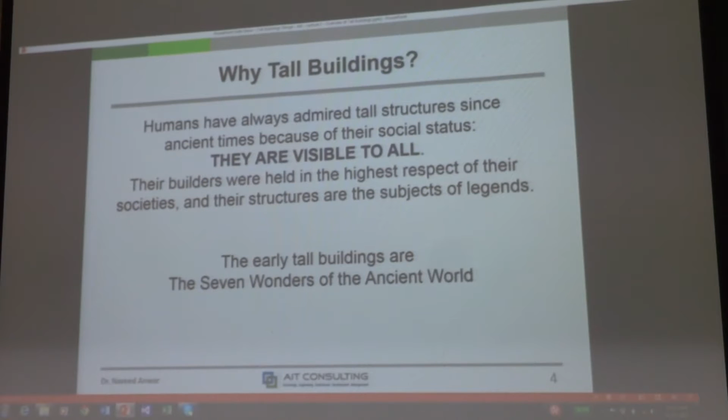This, for example, human being is only that much high. Why would we make a roof that high? Nothing in between. Useless space. But they want to make very tall columns and put the roof over there, even though they only need that much space to work under, right? It's just a way of showing your strength, your technology, your ability for greatness. So that's one of the background behind that.

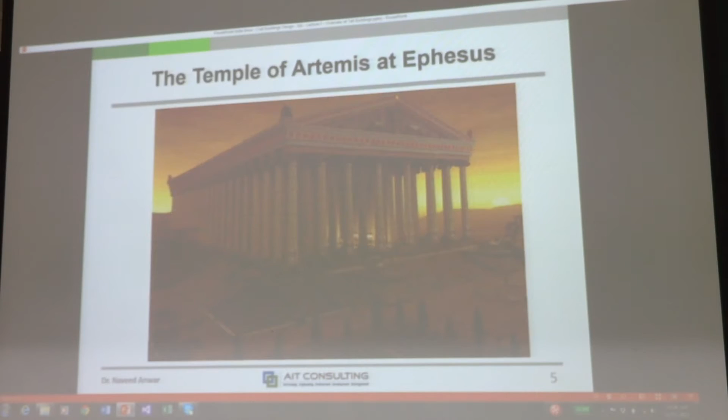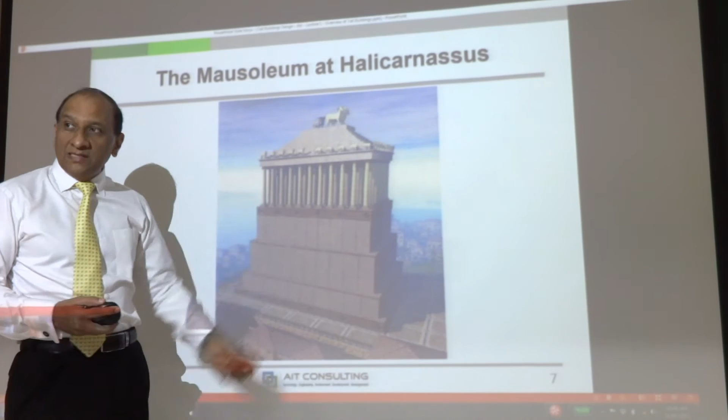So a lot of things that you see are based on the intention to make something really tall. So this is not tall enough, so they put a very tall pedestal, then make the building on top of that. No use, nothing in there. It's not even used. It's just solid. Nobody's living there, right? But they just want to make it tall. So at that time, tall was only possible by making it stone or solid, but not multi-story tall, as you can see here. Just tall, long columns, and then put something on top of that.

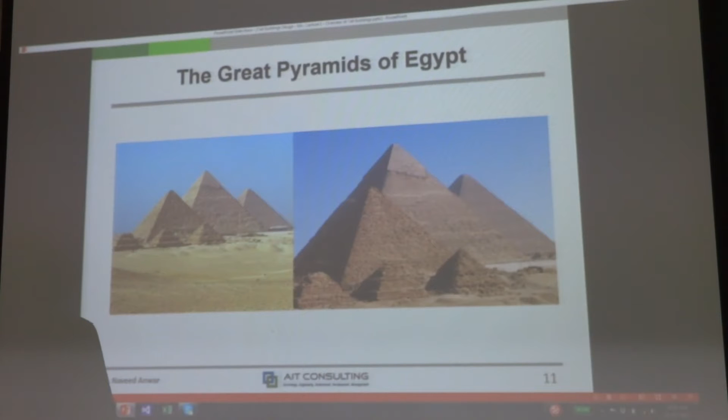Then there came other buildings, and even the statues had to be tall. Everything had to be tall. Halls have to be tall. The pyramids have to be tall. And of course, nothing in there. Inside you cannot even go. It's so narrow, you have to crawl. There's no space inside. But they make this huge place just for the effect. But now that time is no more there. Now we are in a different time where we need it.

And the reason we need it is because of two things. One is population growth, and second is urbanization. Everybody wants to live in the city. Previously, people lived in the rural areas, single-story house, mud houses, caves, and all those things, like the Incas used to live. So if you go back to history, people used to live very simply. But now everybody wants to come and live together in a small space. There is no space, so you have to go vertical. So that's the reason tall buildings are going to be very important.

So percentage urbanization means that most of the world in the next 20-30 years is going to be urban. That means about 80% of the population is going to live in the cities. So if 80% of the people are going to live in the cities, you are going to have to make many tall buildings for them to stay there and work there.

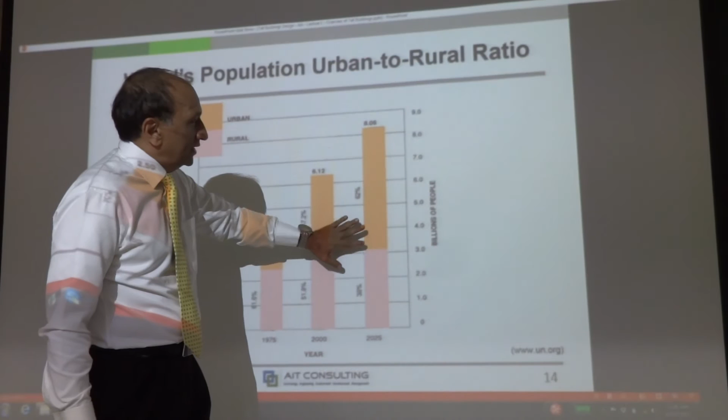So population growth also now is very high in many countries. So in these countries, population growth and urbanization combined together create a huge demand for cities to make tall buildings, even just for simple living, not to show off, just to live. We need those. And you can see from here that the urban to rural population is now changing, and very soon it's going to be mostly urban.

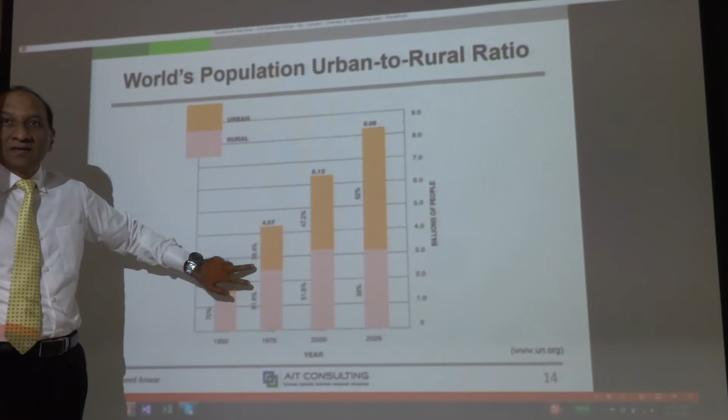As you can see from here, most of the population growth is going to be urban. Rural is almost now saturated, it's not going to grow. So all of the future people are going to move or live in the urban areas, and you can see from here, huge, from here to here about 3-5 billion people are going to live in cities, right? Currently, only 1.5 or 2 billion. So 4 times to 5 times more people are going to live in the cities.

Obviously, single-story houses are not going to work. There's not enough land there. So tall buildings are the need of this century, especially. Previous century, it was some cities only, big cities like New York, Tokyo and all. This century, every city is going to need tall buildings.

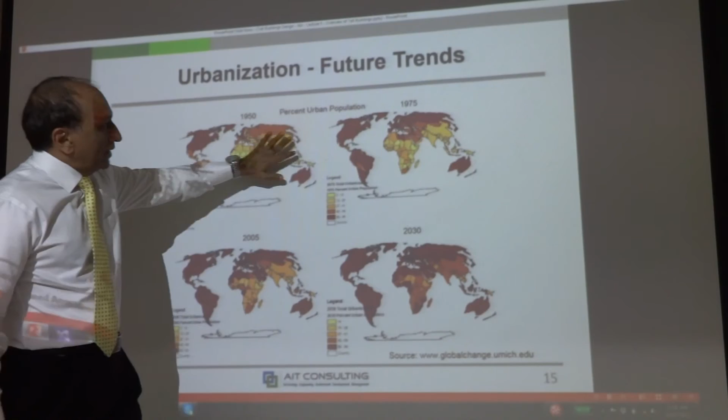And you can see that gradually, all these areas which used to be primarily rural are all going to be urban. Brown is urban. So by 2030, almost the entire world is going to be urban living, which means tall buildings. Right? So this course that we are now studying is going to be a foundation for providing or designing those tall buildings.

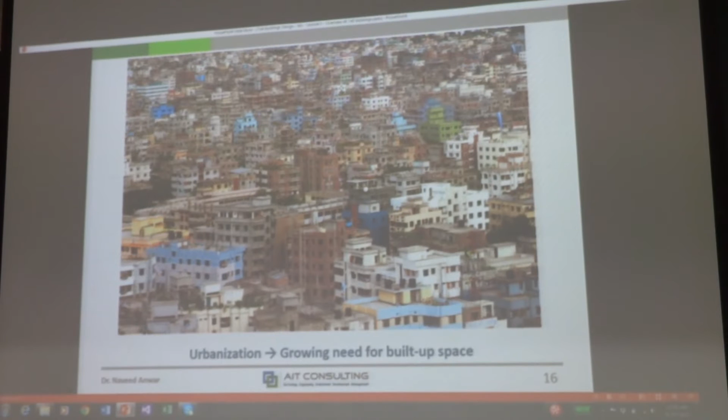These are some of the cities that you can see now. When we say tall, we will talk about what is really tall, what is meant by tall. Its definition is not universal. We'll talk about that. But you can see that congestion is going to force us to make buildings which are going to be tall.

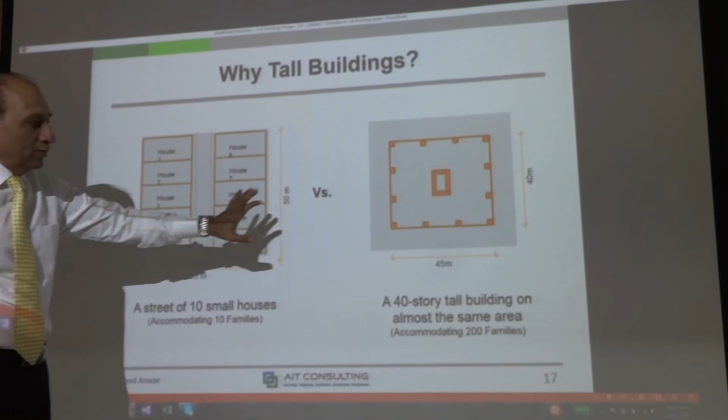Another, this is a simple comparison. On the same plot of approximately 50 meter by 50 meter, if you have 2-story houses, you can accommodate about 10 small houses there. So 10 families can live there. In the same plot, if you make a 40-story building, about 200 families can live there. So you can see that on the same land with a 40-story building, you increase the occupancy by about 20 times. And that is the reason tall buildings are going to be extremely important.

And then another new paradigm or new change in urban planning is coming up. When the United States was developed in the 60s, if you look at the cities in the US, almost all cities are planned in a very vast area, like Los Angeles and other places. So single-story houses, wide streets, and everybody needs a car. The whole culture of the US was based on the car. So if you look at that, the blocks and the cities are all designed like that.

England is opposite. London is totally opposite to that. It's designed around the metro, the underground. So basically, they don't want cars. Hong Kong is like that. No cars. All the transport will be by public transport, by underground or trains.

So the difference between the two is an environmental difference. Because people who live now in this compact city use much less gas, they use much less energy, they build much less roads, so they spoil much less environment. So from all those environmental considerations also, making tall buildings or making living based on the public transport system is going to be the key.

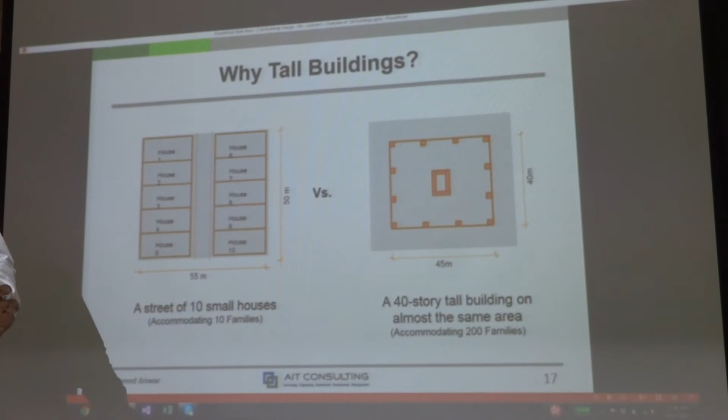So that means city centers built around the public transport system, an underground station around that building. Hong Kong is already completely like that now. Almost the entire Hong Kong has become like that. People don't own cars anymore at all. Hardly anybody owns a car.

In Hong Kong, those of you who have gone there many times, this is the office building, and from here to the apartment building, there's an escalator, a walkalator. So people just stand and walk there because it's all a compact city. So there's a whole cultural change which is coming, and cars are going to be out of fashion, which means that people will need tall buildings, multi-use buildings, office, accommodation, shopping mall, movie theaters, everything in one place, right? So for all that reason, tall buildings are going to be very important.

What is tall? That is a very tricky question. If you go to New York, for example, or even now in Bangkok or in Hong Kong, and if you ask somebody, what is a tall building? They will say, yeah, 70-story, 80-story, 90-story. So they'll talk like that.

You go to another city, let's say in Pakistan, in Lahore, what's a tall building? 25-story, right? Another city, 10-story. I have been to cities where they say we are designing a tall building, and how high is that? 10 stories. So 10 story is tall for them because that is the tallest building in that town. So tall is a relative term, right?

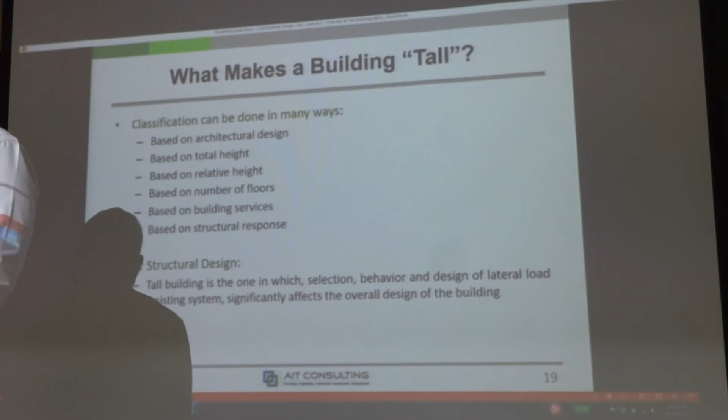In Bangkok, we don't even care about 30-story buildings. Everybody is doing it. Even junior engineers are given 30-story buildings because seniors are doing 60 and 80 and 90. So it's also relative, so it could be based on total height, based on relative height, based on number of floors, services, and so on.

But for us, structural engineers, our definition is very simple. If the building design is governed by lateral loads, it's a tall building for us. So if the lateral loads become important, earthquake and wind, more important than gravity load, then that means it's a tall building, because then the considerations for the tall building start to come in because of the lateral load system and all the things that we will talk about.

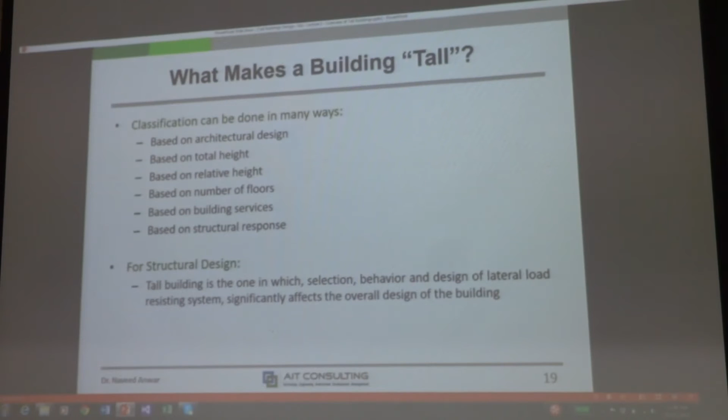So in fact, for us, any building in which lateral loads become important or significant, or they override gravity load design, then it is a tall building. So some of the tall buildings, I will try to get a new projector, it's not so clear.

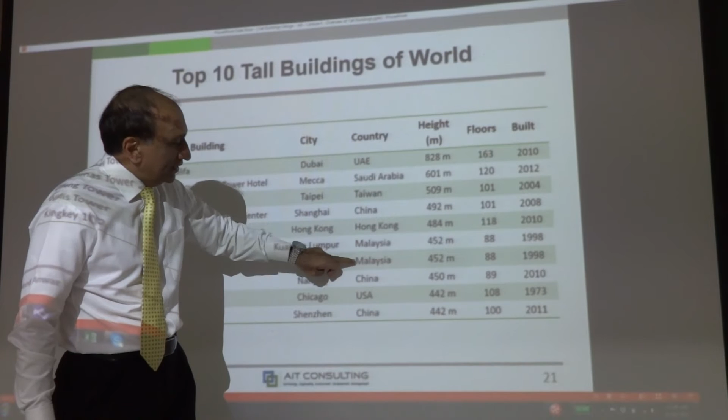UAE, Saudi Arabia, Taiwan, China, Hong Kong, Malaysia, China, USA, China. All of them in Asia except one, right? So that means this is the region where in this century most of the tall buildings are going to be made. Hardly any in Europe, almost none, maybe a few in USA, but almost all others will be here. So you are in the region where most of the tall buildings are. Everybody from US and UK who used to do tall buildings now have offices in this region.

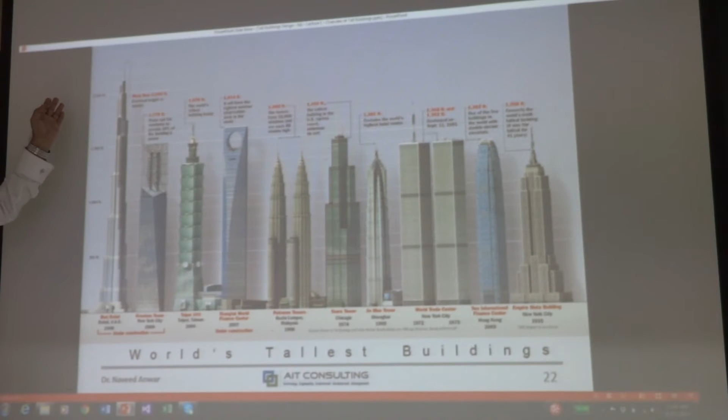And you can see also the height of the tall buildings, how they look in the current way. Of course, there's another one taller than this one, which is almost 1 kilometer high. This is 800 meters. The tallest one is 1,000 meters in Saudi Arabia. They're making it now. And then China will try to cross that one, and so on. So for a long time, this remained the tallest building, but then others came, and then suddenly it started to go.

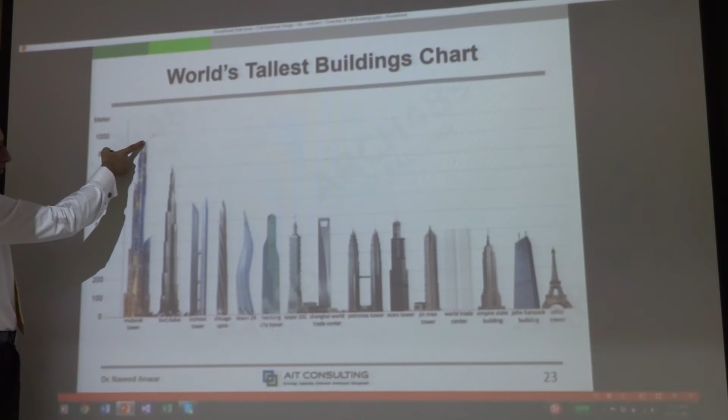This is how they look in real scale. That is Eiffel Tower on the right-hand side, the last one, right? And this is how the Saudi Arabia tower will look. This is the one in Dubai, and then all of the other buildings. So you can see it's going like this. Suddenly we now have a curve, before it was more or less gradual. You make a building, another one will make 2 meters above that.

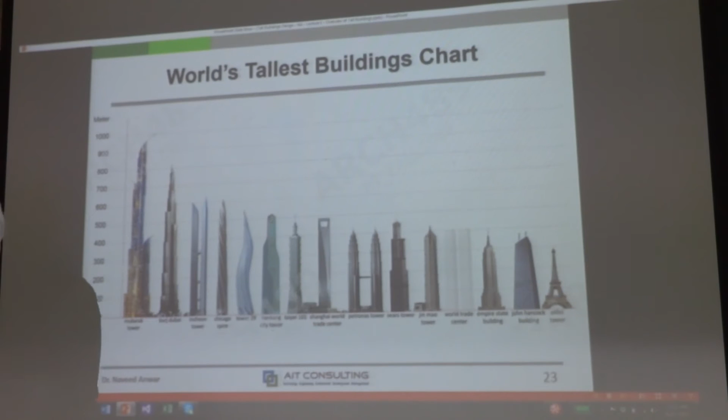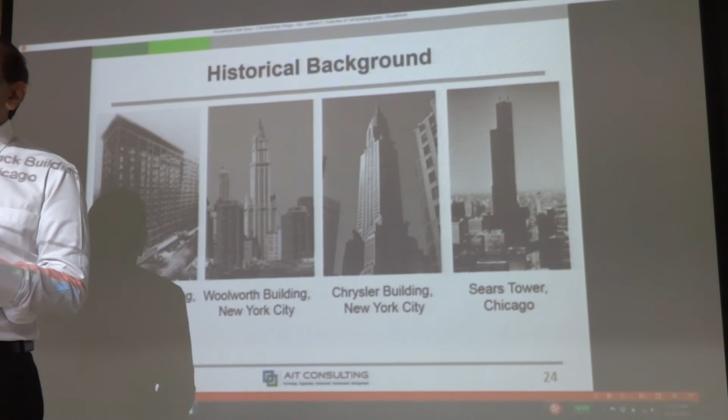Straight 200 meters. They don't want to make 810 meters because they want to make sure that the next one will not be easy to make. So that competition has changed the whole tall building design. So you can see from here how the height is going, right? Number of tall buildings is also increasing in the last few years.

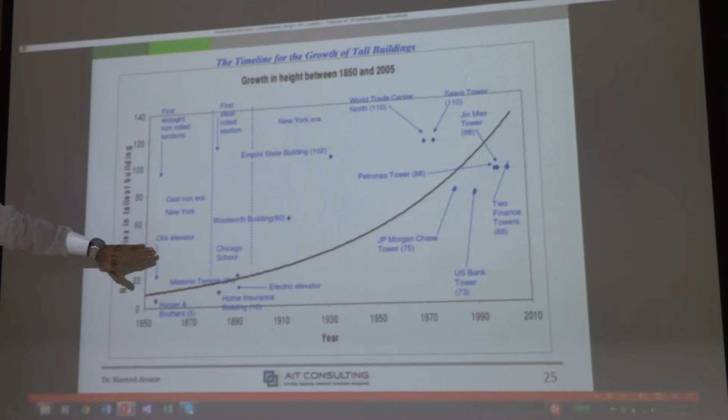This is the growth in height. So you can see up to 1000 meters, 1800 meters is possible. There was a time when we were studying, when most engineers thought 100 stories was the limit, 300 meters. Then somebody came up with 500. Now it's 1000, 1200. The designs up to 4000 meters are existing. They're just looking for somebody to finance it.

4-kilometer high buildings, right? Somebody has already created the design, the concept design, right? So you can see that this graph will go up very rapidly.

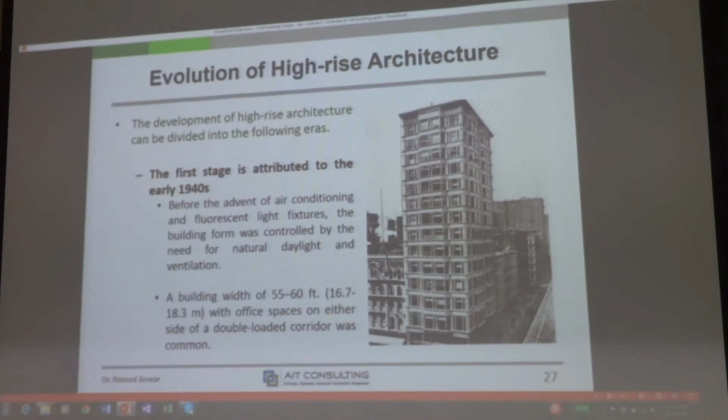So you can trace the whole history in architecture. 40s buildings were like that, very straightforward, rectangular form because they were made in very simple materials. Then the forms started to change, steps, then more forms, and now in the fourth phase architectural designs have evolved, and people are looking at form as an expression. But before it was just, make a building, so it's functional, you have enough space.

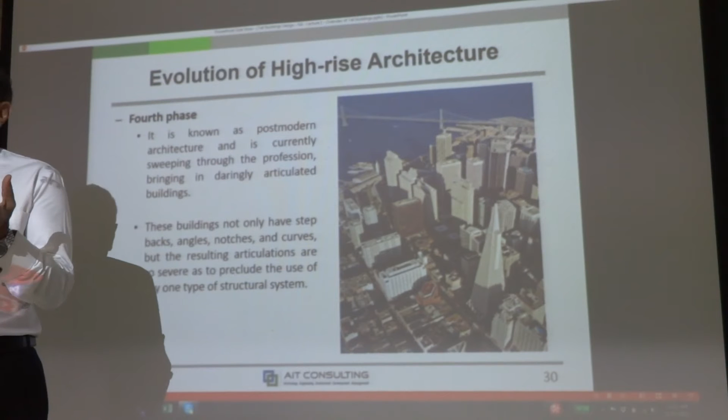One of the problems that was holding back the tall building is not structures, it was elevators. Because there were no elevators. So you could not make a building taller than a 6-7 story building, because who will go there? Then the elevators started to come. So elevator technology has lagged behind structural engineering actually.

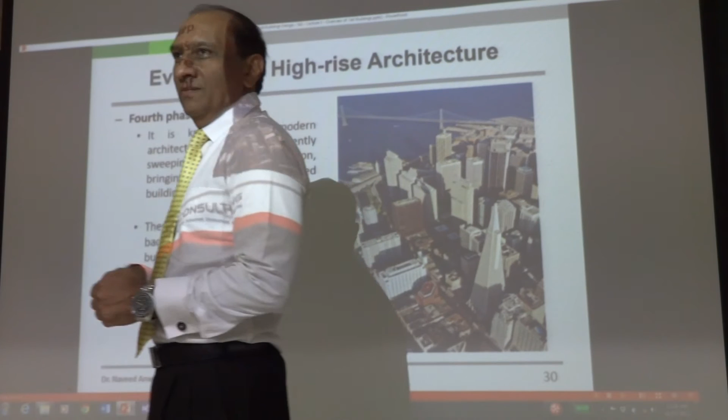So until recently, you remember last course I talked to you about a cable with the maximum length that it can take from self-weight, right? That was a problem with the elevator. Because the cable that will pull the elevator becomes so long that, no matter what you do, it will break by its self-weight. It cannot carry the elevator. So there was a limit on how long the elevator cable can be. That was about 300 meters, 320 meters.

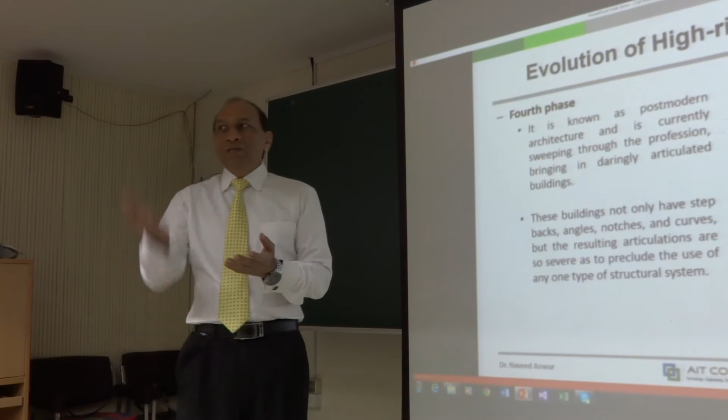So what the buildings did was, you have to change elevators. You go to 100 stories, then you change the elevator, and then the next elevator will start again. So that was what people did in tall buildings.

And then very recently they came up with carbon fiber cables. And that limit is no longer there. Now a single elevator can travel up to 1 kilometer with the new material. And that has opened up all of these buildings. And the speed of the elevator has become very fast. It can go 1,000 meters in 2.5 minutes, right?

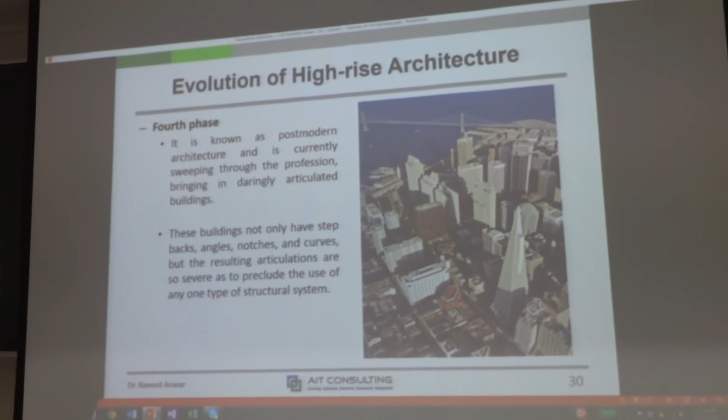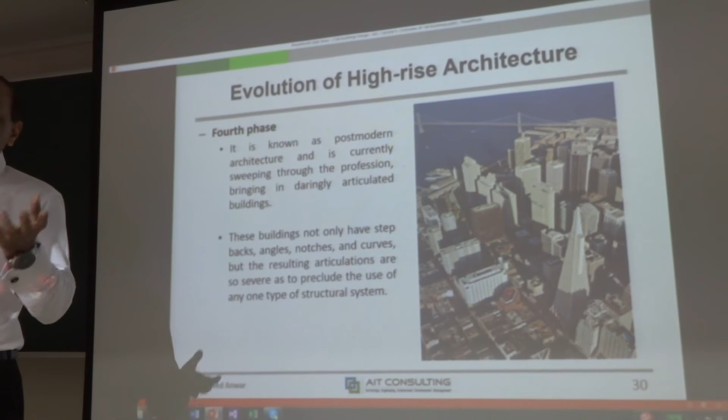So elevators have been one of the reasons why tall buildings were not made too high. And now that technology has caught up with structural engineering, and they are competing with each other on where the technology will go.

Now, the problem is energy. The challenge of the current age is energy consumption in the building. It's no longer structures, it's no longer elevators. It is now energy, because when we talk about the environment, I told you that we are competing with transport. So if you make the building so big, so tall, and it consumes a lot of energy, and this energy is more than the energy you save for people to travel in the city, then it's not worth it. That means to make a tall building viable, the challenge is to make it energy efficient.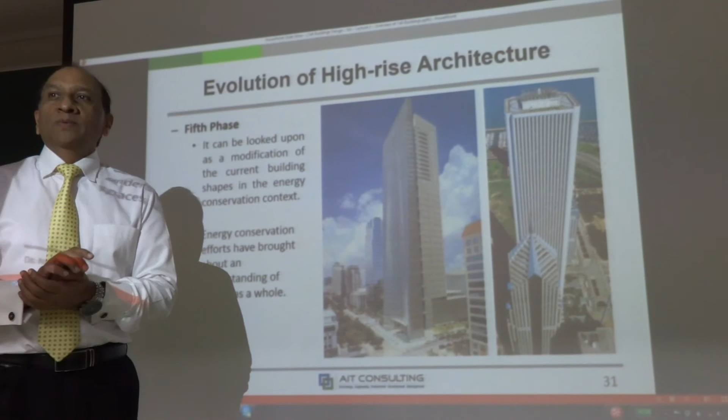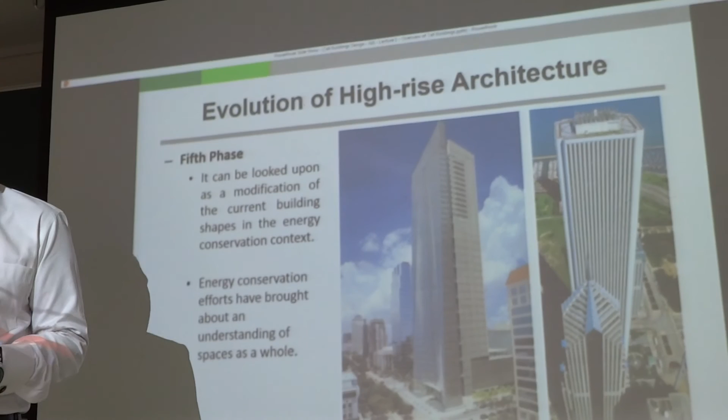So now most of the new development is on making buildings energy efficient. How to make the building sustainable, environmentally economical in energy efficiency. So a lot of new awards for buildings go to energy efficient buildings. Not for the structural system anymore, but rather for which building has better energy efficiency. So water conservation, water recycling, energy cycling, all of those things are becoming a very important part of the design.

So first it was simple buildings, stone, whatever, then architectural considerations, then elevators, then the structural problem, we didn't have enough structural systems, then it went back and forth, and now it's energy. So anybody who solves the energy problem in a building can make a bigger building.

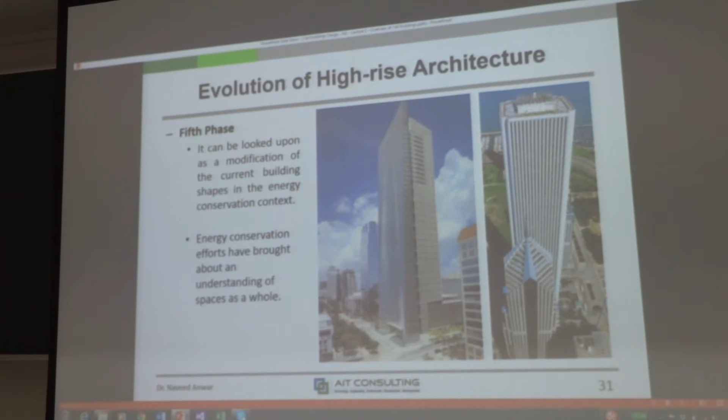In China, there is a guy, I will show you his design later, you might have seen it. He's making a building now which he says is zero energy, because they are generating the energy within the building from different sources. Even doors, when you open and close them, generate energy. People walk, and they try to get energy from there. So they try, and their building design is very interesting.

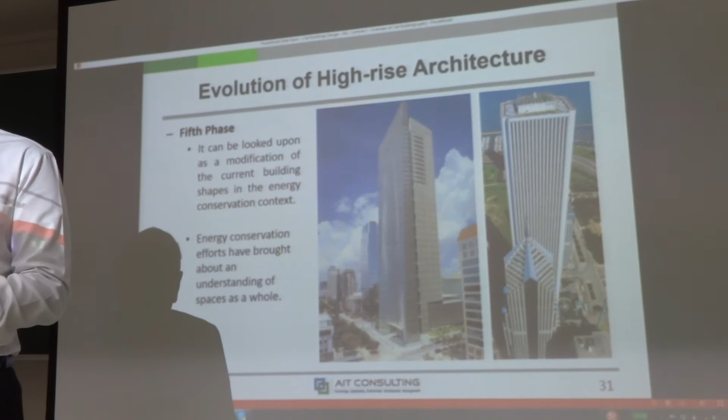The building is outside, and inside the building there is a spiral walkway going from the top to the bottom. It's a 120-story, 130-story building, but you can just walk on a ramp inside the building. So this is a multi-use building. People live here, they work here, the schools are also there, the hospitals are also there, shopping malls are also there. So people just walk up and down to reduce the elevator cost also. So things like that are now coming up in tall building design.

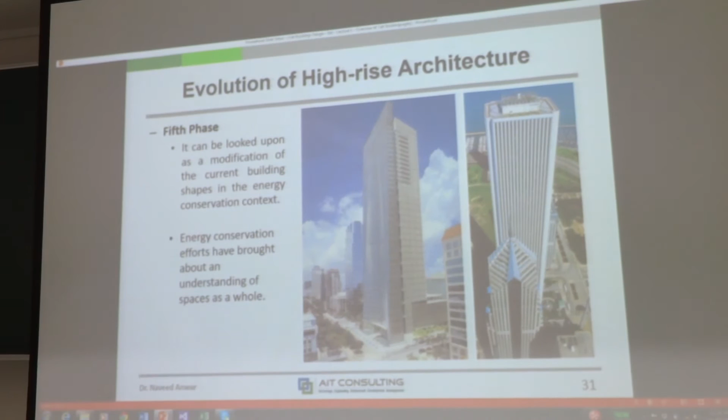This is the breakthrough point for structural engineering. We will talk about structural forms a lot, but I'm just telling you that the breakthrough point in structural engineering, just like the elevator shifting from steel cable to carbon fiber, for us structural engineers, is the tubular system. The concept of a tubular system actually freed structural engineers from the conventional problems of the structural system.

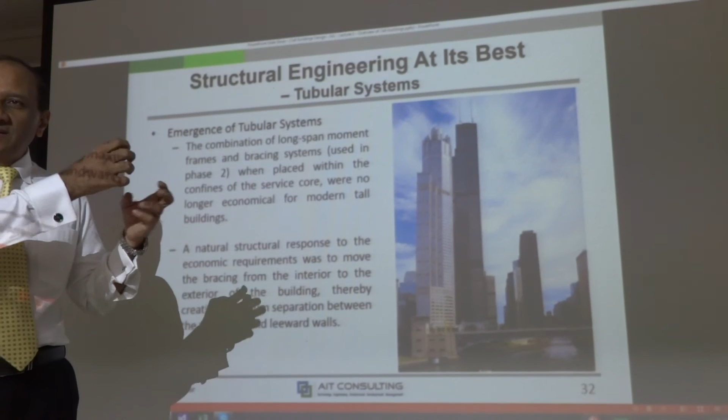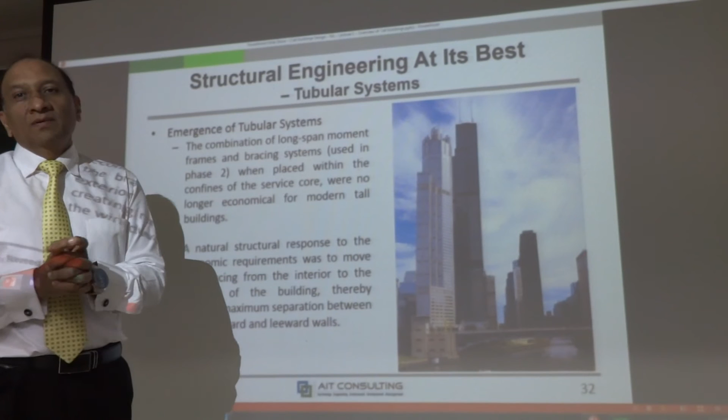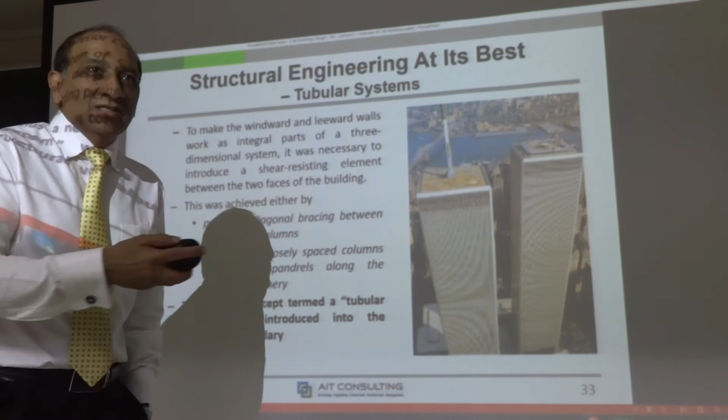These are two tubes, actually they were tubes. One of the reasons they collapsed when the plane hit was that the tubular concept did not account for such issues. But basically these were the first big applications of the tubular system. And then Chicago, the Sears Tower and others. So these buildings were only possible because of the development of the tubular system. And we'll come back to this one.

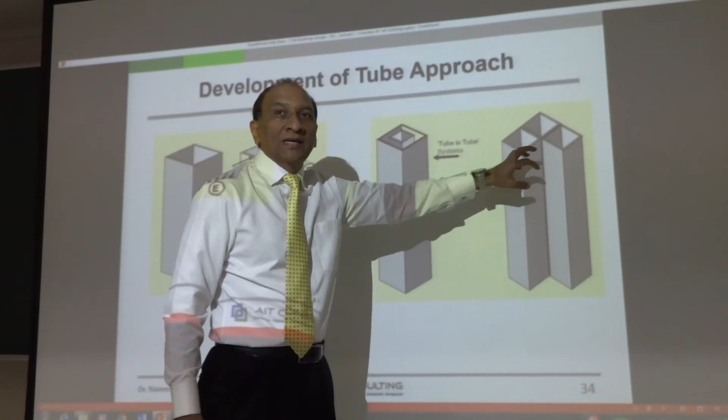But basically a tube means that you treat the whole building as one big cantilever rather than columns, beams and shear walls. So the entire building becomes one member with holes for openings. And then you can put tubes inside tubes or multiple tubes side by side, and that's why you see the Dubai building having 15 tubes, and 21 tubes in the other building. So different height tubes go up and down and they form the building. So the tubular concept is the one that we use for super tall buildings.

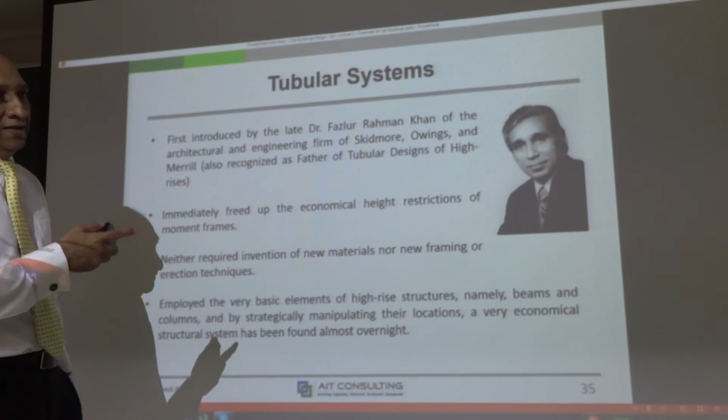And he's the guy who developed that. He also developed many other structural systems. So he's one of the key persons in tall building design. His designs and concepts have actually helped all the other engineers to design tall buildings. And the tubular system looks something like that. We will come back to this.

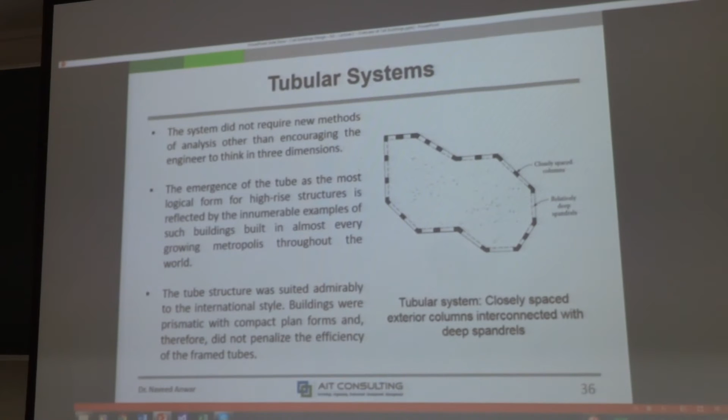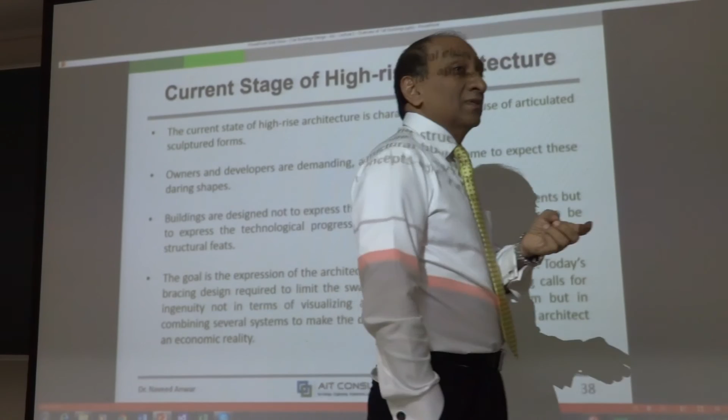So we are basically dealing now with two types of tall buildings. One is normal tall buildings, less than 300 meters, 200 meters, 300 meters, which are now becoming quite common. And then we are dealing with super tall buildings, 300 to 500. Now even a new term has come up, ultra super tall buildings, which are above 500 meters, because they are a different category altogether.

Now we already have 6-7 buildings in the world which cross that line, and the one in Bangkok is also going to be 600 meters. So these are really, really tall buildings. Currently, the tallest building in Bangkok is 300 meters. So the next one is going to be 600 meters, not 320 meters. Double that height, suddenly.

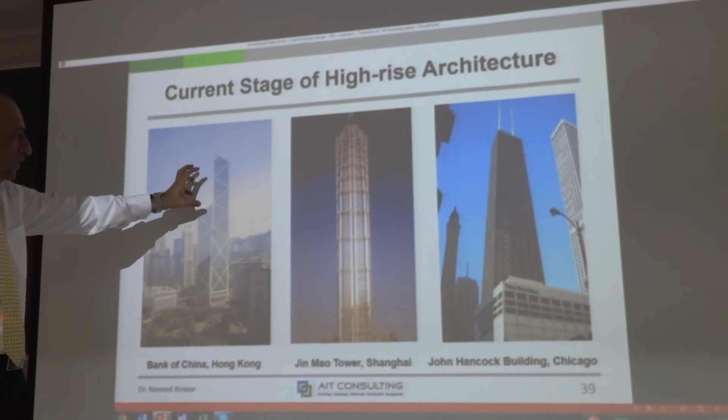So these are architectural expressions, forms; many things are going on, and China and Dubai are the leaders currently in the world for tall buildings, innovations, construction-wise, design-wise, form-wise, energy-wise, everything. All of the major development is going on in those two countries. Okay, now

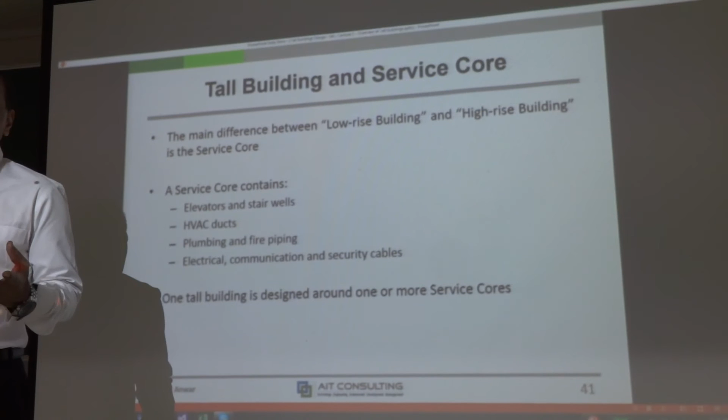if you look at the tall building, actually it's one of the projects where many different types of people have to work together. Unlike a bridge, unlike a dam, unlike a road, unlike other structures, other systems where one or two professionals are normally working. Of course, those things are also becoming complex now because of automation, but tall buildings particularly rely on many people working together.

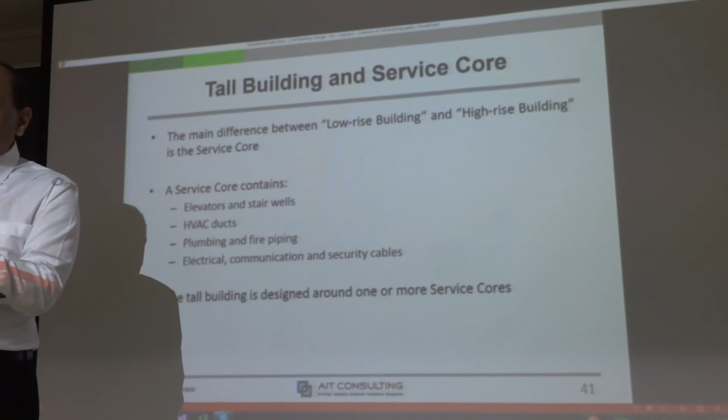And one of the key components of a tall building is the service core. You will see that the service core is the key in a tall building for everybody. That is the place which everybody uses to put their own design there. And around that is the area used by the public. So service core means that it contains the elevators, the stairwells, the heating and ventilation ducts, plumbing and piping, electrical, communications and security and everything. It is contained in that service core.

And that is also where we structural engineers put our structural components most of the time, right? Shear walls. So shear walls are generally put in the service core, or let's say the service core is put inside the shear walls, either way. So the service core is the key. A tall building is designed around one or more service cores, and they service everybody. And often in some plans, the service core area is larger than the area available for actual usage as the building becomes taller.

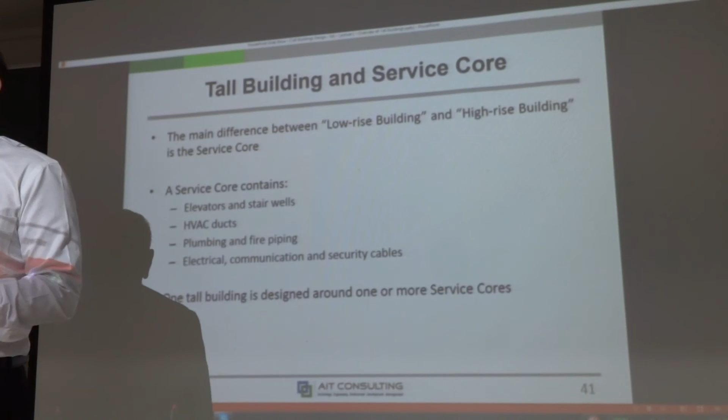Because you have to put too many elevators. You cannot put few elevators. When the building becomes taller, you have to put maybe 20 elevators. 20 elevators take a huge space, and you cannot make a tall building too big because of wind and earthquake and other things. So the service core is the key, and around that you find some small areas left for people to use with a view. So people pay a very high price for a small area in a tall building. Now you can see from here, so that's the service core.

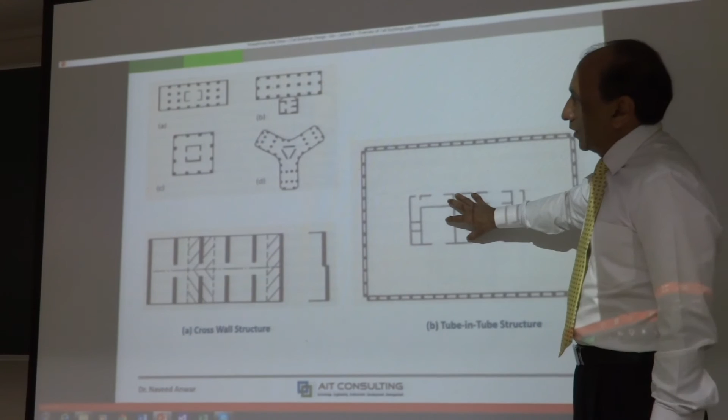That is the service core, service core, service core. And inside here, service core. This is not a service core building; this is a much smaller building. So you can see the service core often takes the central place, not always. This is the side, and around that you have the usable space. This is the most common plan of a tall building, and this is where you put your structural elements. In a tubular system, the tube is put outside and the core walls inside, so they work together.

Today we are just looking at things. We are not studying anything, just giving you some idea.

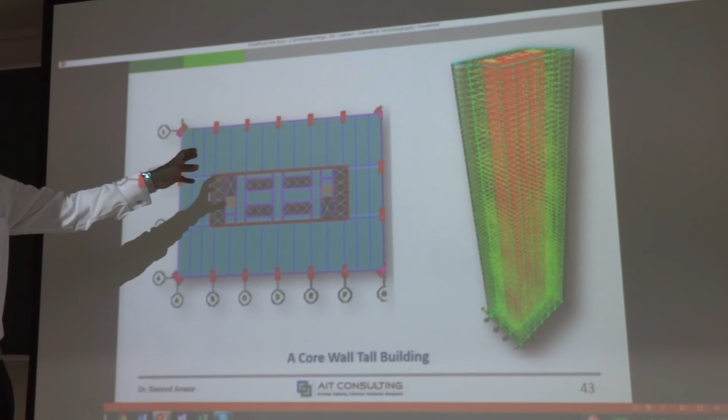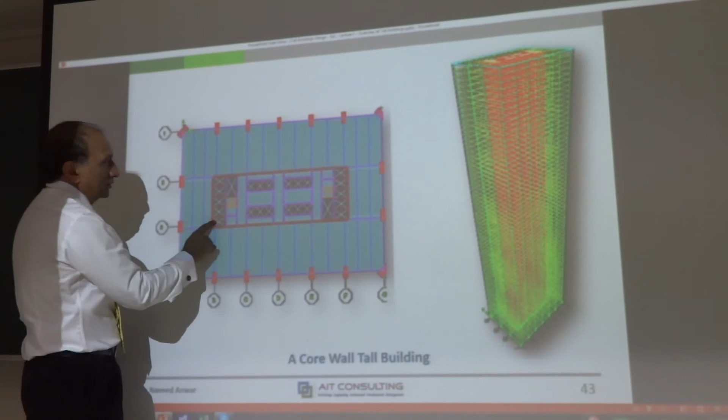This is one of the buildings in Bangkok. Those of you who have seen Central World, right? Central World has a tall tower on the side, the hotel, based on this concept. This is the plan for that core. You can see the service core is huge: 22 elevators. Each cross is an elevator. So elevators take almost all the space, then some staircases, so this area is all service core, and this is the only area left around it for people to use.

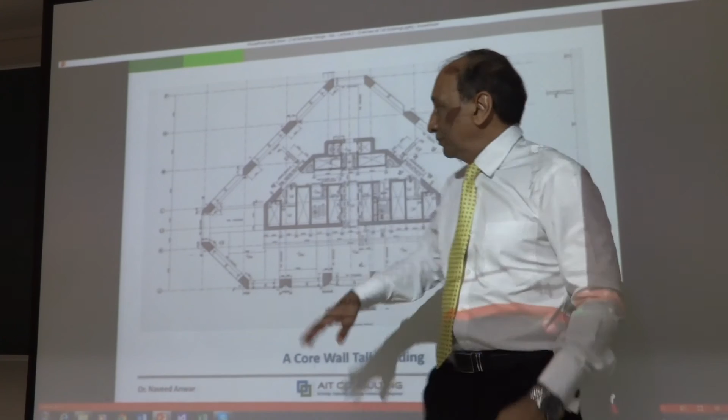Another big building, see all systems in place. This is a very nice, beautiful building in Bangkok, Conrad Hotel. If you go to that side, you can see. Look at the service core, and that is the only area left outside for people to use. So the service core takes up a major portion of the building. This is only 65 stories high, not even very tall, right? The service core is quite big, and you can see elevators. So many things need to be there.

So it's a highly complex area where everybody is fighting for space. Electrical engineers, mechanical engineers, security engineers, communication engineers, structural engineers, architects, fire engineers, everybody is fighting over this space, because everybody needs to have their system designed within it. So this is one of the key problems in tall buildings: all these professionals trying to control this space.

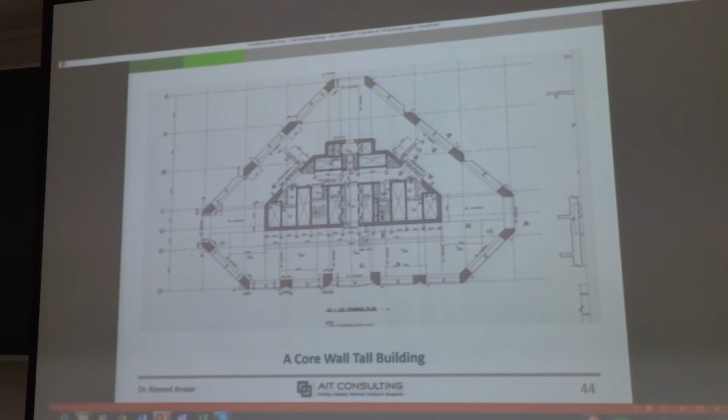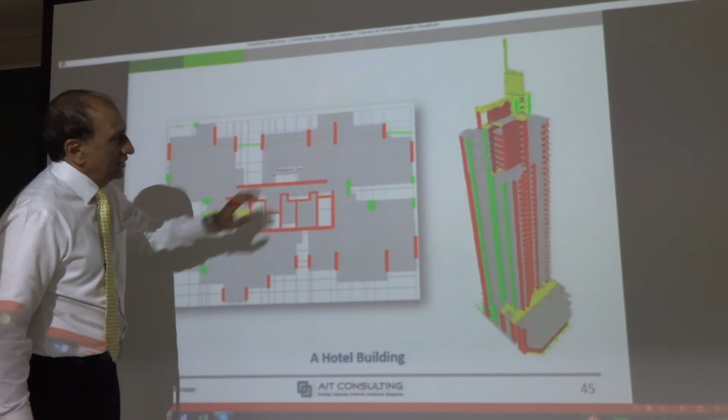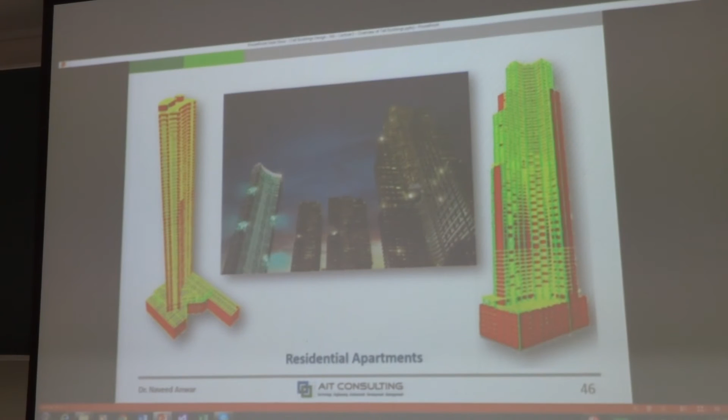So, in architecture, they teach them about two things, form and function, right? Everything that they design has a function and has a form. And the fight between form and function is a fight between architects and engineers, a lot of time, and architects and other people, and architects and cost.

Because many of the, not all, many of the architects want to concentrate on the form, and they sacrifice function. In fact, all of the 7 wonders are just form, hardly any function. They do nothing. They just are there to convey some message or make something look great, but do nothing. Right? Monuments are just form, no function. Right? Warehouse is all function, no form. Right? So there is an in between.

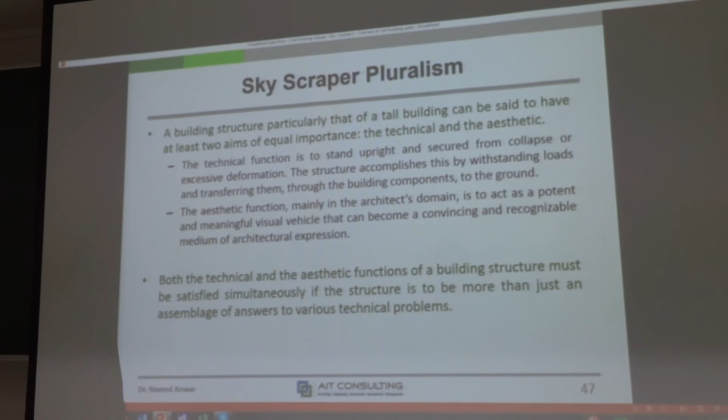Currently, this pluralism that we call it, two things to be balanced together, now the third item is environment, which is not here. So in fact, the third one is now environment. So the balance between form, function, and environment is now the challenge for the tall buildings. So this is the key behind that for us.

Structural theory is kind of universal. That means no matter what the problem is, where we are making it, who is making it doesn't matter for us. It's a structure, it's a column, it's a beam, it's a wall, it's a rebar, it's a bending moment, it's a shear force, right? It is universal. It absolutely doesn't matter where, when, who is making it, for what purpose. For us, it is bending moment and shear force, stress and strain.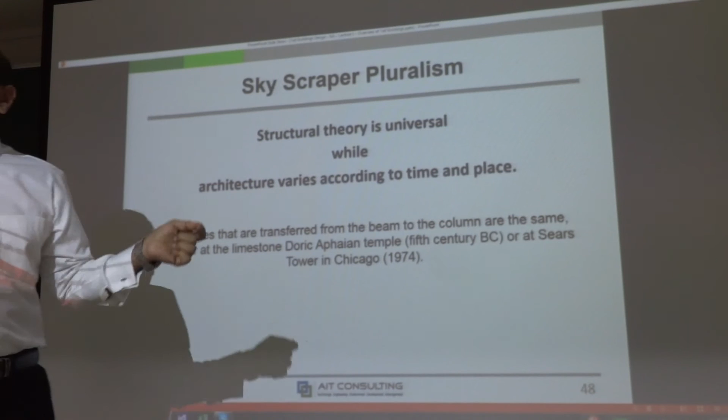Ultimately, last time I told you it's all about axial strength and axial stress, correct? So that's it. We only know that. So for us, it is universal. For architects, it's not. For them, every building has to be unique because the culture may be different, the city may be different, the environment may be different, the sky may be different, the sun may be rising from a different direction, the people's color may be different, and so on and so forth. So for them, a challenge is that every building has to be according to time and place. For us, it's timeless.

So a building is actually made up of many systems. Basic functional system and architecture, which the architects will normally plan. Then structural system, where you will come in. Heat, ventilation, air conditioning system, very important for a building. Plumbing and drainage system, again very important for them. Fire safety, cladding systems, security systems, and other specialized systems.

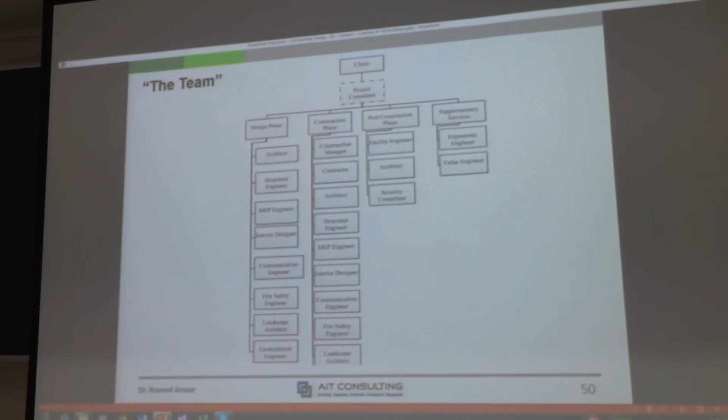So many people have to work. I forgot landscaping and interior decorators here. They are also becoming very important now. Okay. And other people are coming in now. Actually, this list is not complete. So the team is organized like this: in design phase, in construction phase, in post-construction phase, and then you have the project. There are various phases in the project. So huge teams, contractors, and so many people.

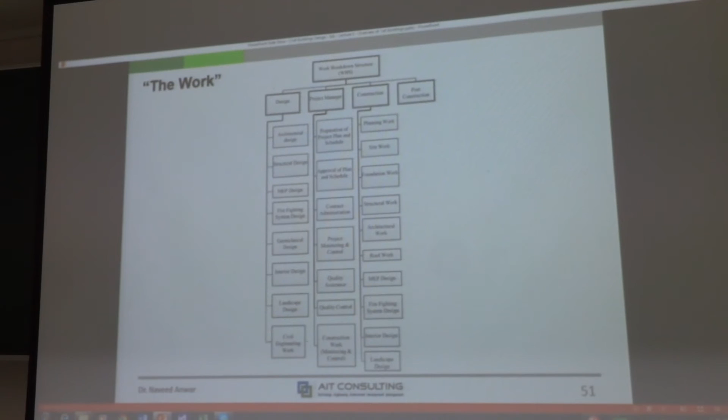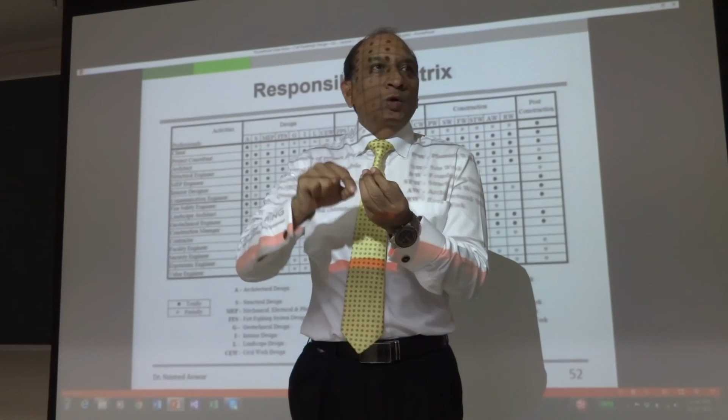So this is something that you cannot see clearly on the screen, but when you get the notes, please look at that. And the work breakdown, how the work is broken down. We will come back to these later. But I'm just trying to tell you, there are many people involved. These are the things to be done. This is the type of work, and then who is doing what. For example, if it's a tall building and structure has to be designed, then who will design it, who will check it, who will verify it, who will advise on it.

So all types of actions during a process by different people for different tasks are listed in one sheet. So everybody knows exactly who is doing what, right? So the responsibility is divided into many categories: approval, assisting, helping, things like that. And then you put those dots, and this shows, okay, this is a complete picture of what people are going to do for this particular thing, right?

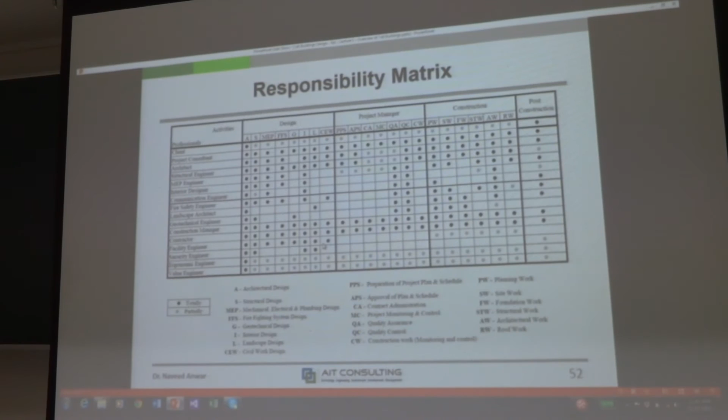When you make any proposal for a project, a client will ask you, give me your responsibility matrix, so I can see if something goes wrong, whose neck I will catch, basically, right? It also shows you the hierarchy of doing things. So all these things you can see. One more important thing in the responsibility matrix or the responsibility category is, what if something goes wrong in a building? Whose responsibility is it?

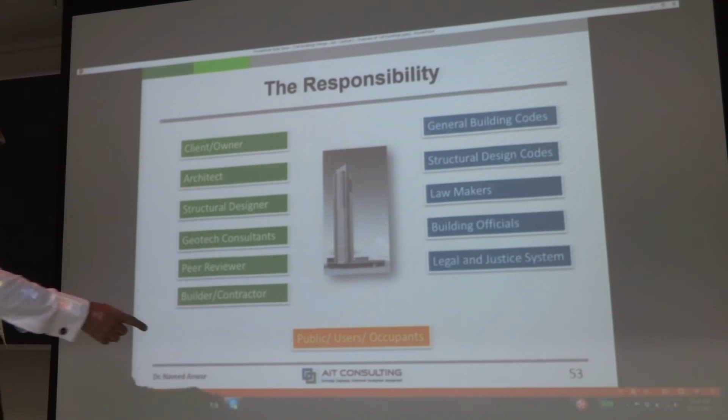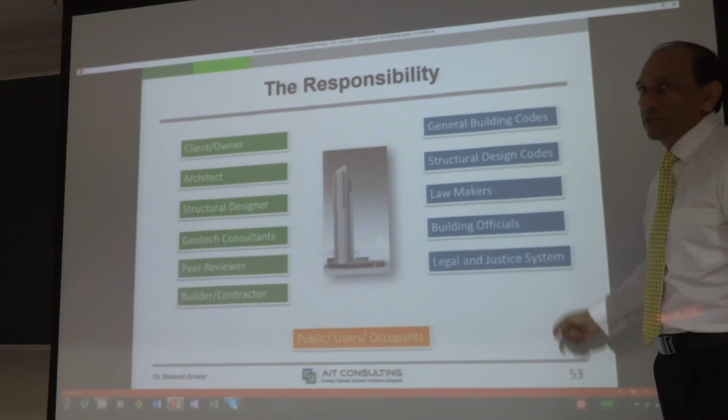It's a tricky question, because in a building we have the client and the owner, we have the architects, we have the structural engineers, geotechnical engineers, people who check the design, and builders and contractors who make the buildings. And on the other hand, we have the building codes, structural design codes, lawmakers, building officials, legal and judicial system. And then there is a public user and occupant.

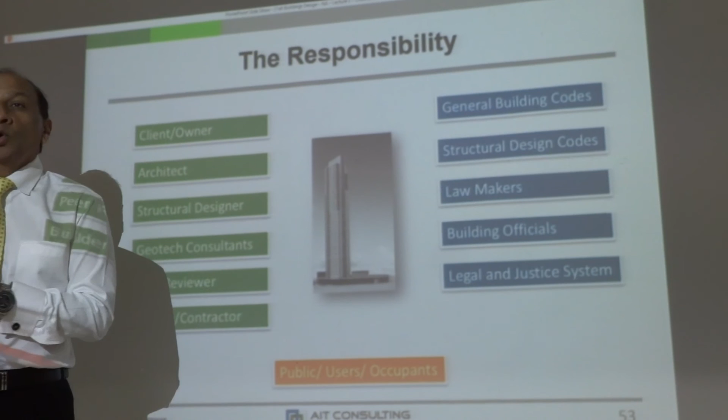Now the question is, if something goes wrong in this building, let's say it falls down, and some people are hurt or killed, whose responsibility is it amongst all these people? So this is a very complex issue. Insurance companies don't know what to do in this case, right? Because this building may be insured. So finally you may make the claim to the insurance company who has insured the building.

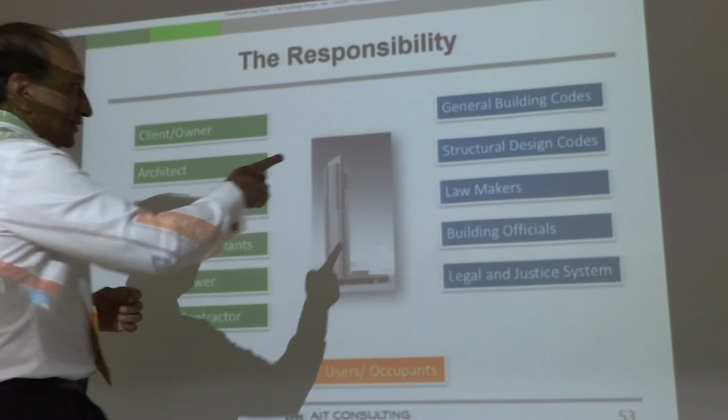But the insurance company would like to see who's the one at fault, and that's where the investigation comes in. But at that time, we have got to not just follow the code, because everything may have been followed exactly, but still something went wrong. Then it becomes a challenge. Design is okay, construction was okay, everything is okay, but still something went wrong, right? So then we need to do more sophisticated analysis than the building codes will allow, and we will talk about that in the second part of the midterm in performance-based design. Okay?

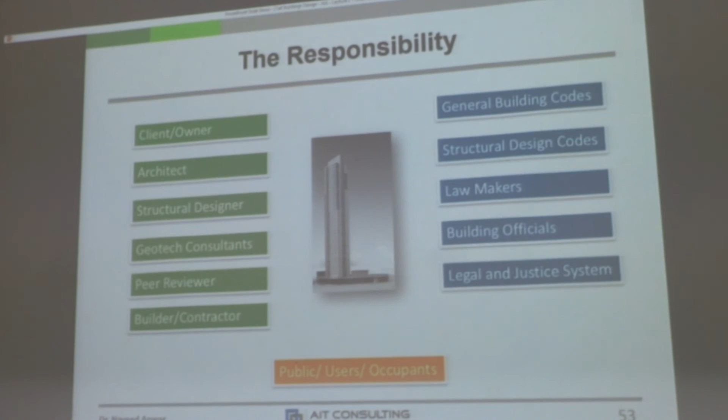So, just to conclude, architects normally are the team leaders for tall buildings, so we have to accept that this is an architect's project. Unlike a bridge, where a structural engineer may be in charge, a building is an architect's. So if you want to excel as a structural engineer, to show off your work, a bridge is where you might go. But even that now is being taken over by architects, because people want nice bridges.

One of the things that we don't do well is aesthetics. Engineers are very bad at making nice things. They always make ugly things, and people don't like that. So that's why engineers are not really respected, because we don't know about aesthetics, right? We just want to do simple, straightforward things in a very poor way. So that's why architects tend to take all of the main work and most of the money also.

Then geotechnical engineers who look at the soil, right? Electrical and electronics engineers who look at all of these things. Mechanical engineers, mechanical systems. Plumbing engineers, construction engineers, communications, landscape, fire safety, security consulting.

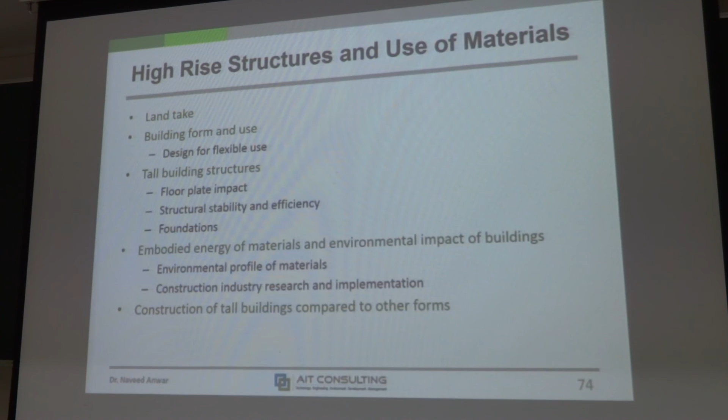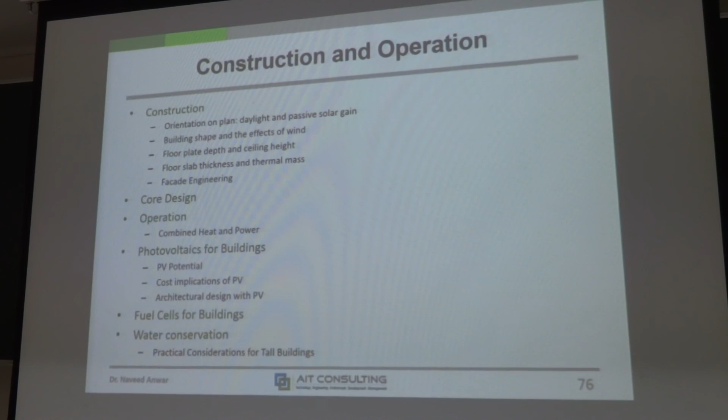Most of the sustainability issues are related to the construction process. During construction, a lot of environmental impact is created through waste, through noise, through pollution. So the construction process has to be sustainable too. No wastage of water, no wastage of material. How do you dispose of the waste material? How do you recycle what is out there? And how do you conserve energy during the process? Alright, so that's just an overview of the tall building.